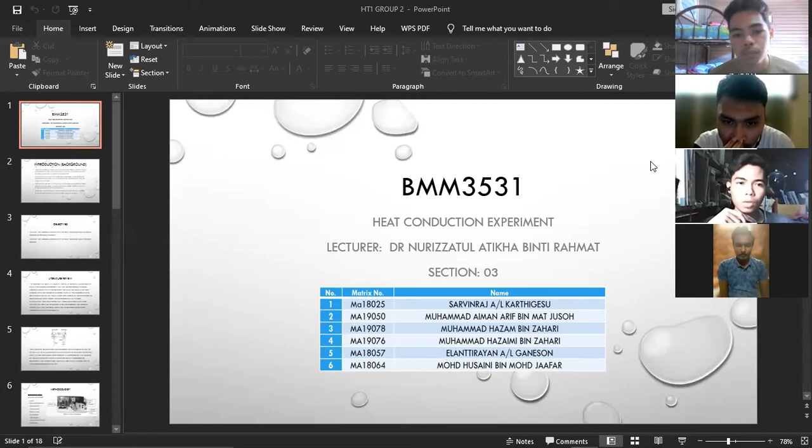So today we are going to present about our last experiment in the BMM3531, which is heat conduction experiment. We are from section 3 and this is our group members. So my name is Muhammad Hazam bin Zahari. I will present to you about introduction and objective for this experiment. Next.

For introduction, the first one is heat is carried by means of collision between rapidly moving molecules closer to the hot end of a body of matter and the slower molecules closer to the cool end. The second one is conduction is poorer in gas because the molecules are relatively far apart and so interact less frequently than in solids and liquids.

The third one is metals are the best conductors of heat because some of their electrons are able to move about relatively freely and can interact frequently by collision. The last one is thermal conductivity is thus a second order tensor, but in a material with cubic isotropy it reduces to a scalar. Next.

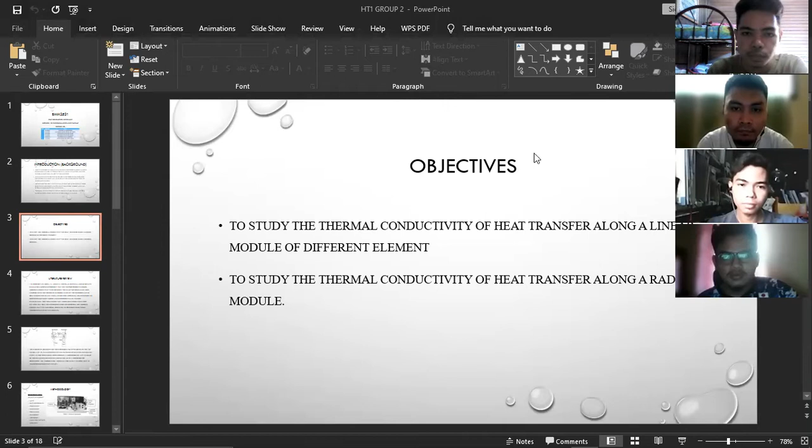All right. For literature review, T.B. Ferrari, S.H. Hara, J.L. Aziant, L. Rocha, E. de Paula, and M. Mulato evaluate a simple experiment that may be performed to assess thermal conductivity for different metallic materials and then compare with the theoretical model given by Fourier's law of heat conduction in 2002.

Using a scientific approach, the fundamental disparities between theory and experimental fact were investigated. They discovered that there are losses and other factors that must be considered when determining the thermal conductivity of a material, resulting in difference between theoretical and actual results.

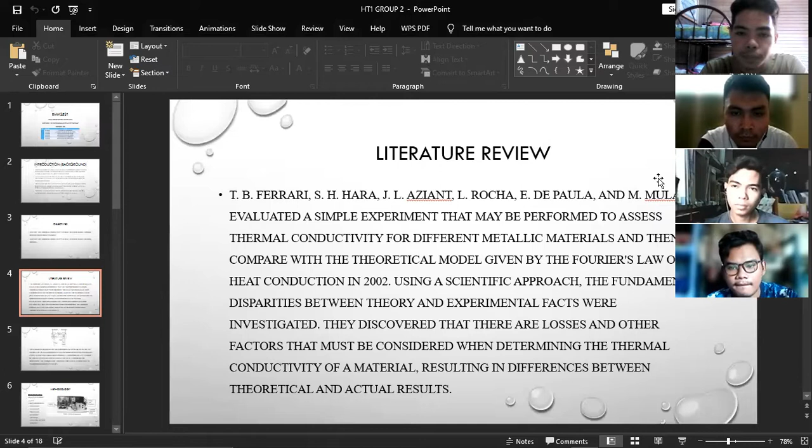The schematic drawing for the experiment setup is shown in the top figure. Cup 1 is an aluminum cup that is filled with water and heated over a flame while being monitored by a thermometer. Cup 2 is made of Teflon and filled with ice and water, with a thermometer monitoring the temperature. Through a metallic cylinder, heat is transported from cup 1 to cup 2.

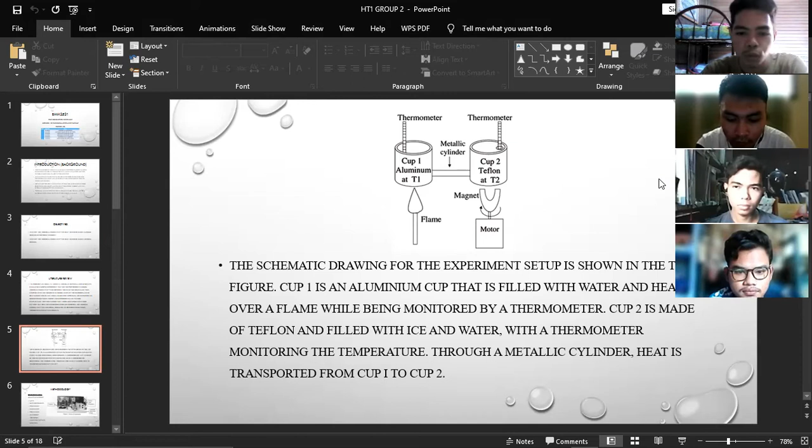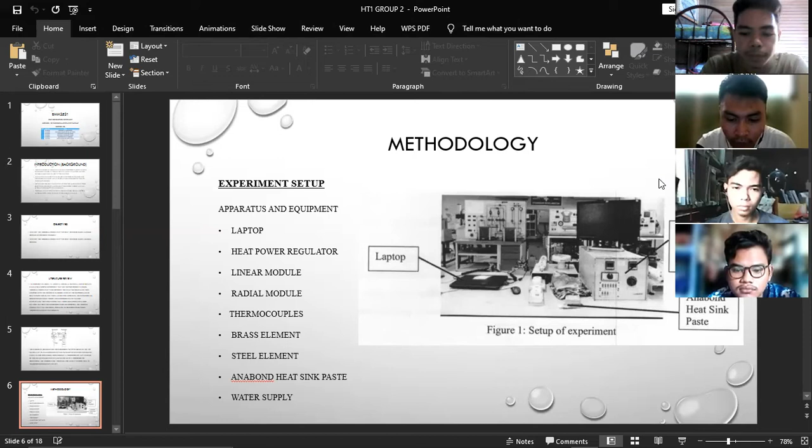For experiment setup, we use laptop, heat power regulator, linear module, radial module, thermocouples, brass element, steel element, heat sink paste, and water supply. Okay, next.

Okay, next we go to the experimental procedure. We have two experiments, that is linear conduction heat transfer and radial module. First, we go to the linear conduction heat transfer. First, the main switch is initially off. Then a brass conductor intermediate section is inserted into the linear module and clamped together. Two, the water supply is turned on and the water is ensured flowing from the free end of the water pipe to the drain. The interval is checked.

Three, the heater power control knob on the control panel is turned to the fully anti-clockwise position and the sensor lead connected. For the power supply, the main switch is switched on, the digital readout will be illuminated. The heat conduction experiment software loaded.

And number six, the heater power control turned to 20 watts and sufficient time allowed for a steady state condition to be achieved before the temperature at all six sensor points and the input power reading on the wattmeter are recorded. This procedure can be repeated for other input power between 0 to 20. After each change, sufficient time must be allowed to achieve a steady state condition.

Now we go to experiment B, that is a radial module. First, the main switch is initially off. The stainless steel section or any other metal is inserted into the linear module and clamped together. Number two, the water supply turned on and the water is ensured flowing from the free end of the water pipe to the drain. This should be checked at intervals.

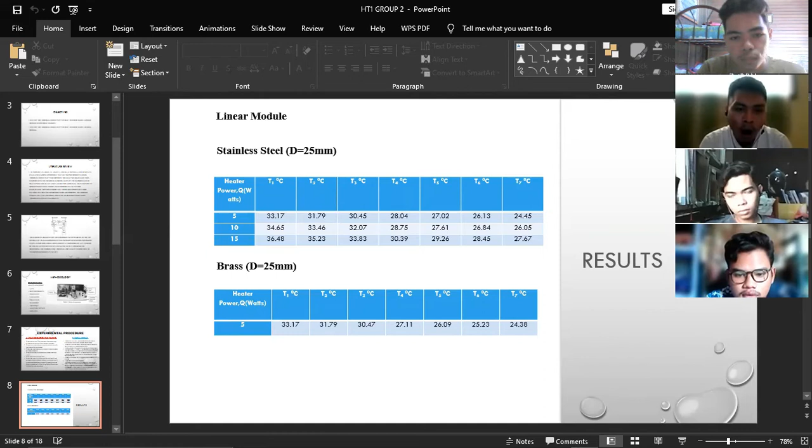Good day, everyone. My name is Sarvinraj Karthigesu. So today I'm going to explain about the result. Okay, this is the result for the linear module for stainless steel and brass. This is the data given by our lecturer, and then we just take the average point for each watt. For 5 watt, we take the average point, and then for 10 and 15 continuously we take the average reading.

Next, from the data above we need to find the gradient. So we use the formula dT over dx. From that we find temperature 1 minus temperature 3, divided by the distance, so we can get the gradient for the 5 watt, 10 watt and 15 watt. This is how we find the gradient for the dT over dx value.

The next part will be the question required for the thermal conductivity. For thermal conductivity, the data given is that the diameter is 0.025 meter, and from the diameter we can calculate the area using pi d squared over 4. Using the formula we can get the area value. From that we can find the k.

This is how we derive the formula for k. From the derivation we can find the thermal conductivity for 5 watt, 15 watt and 10 watt. This is how we get the value for the thermal conductivity. Next, we use the same method for the brass.

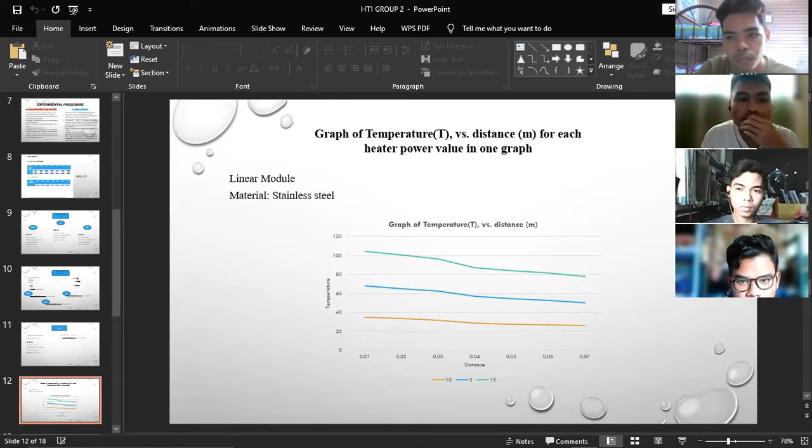It is also possible that the thermocouples are not configured correctly. This would have also disrupted the graph. Readings are taken during the steady state condition because there is no more temperature variation with time. Data collected would be more accurate. Next. This is the graph for the brass.

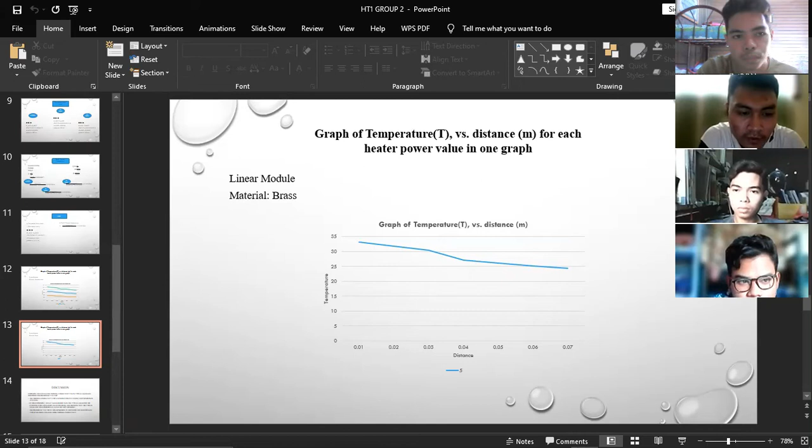The first one is to compare the calculated thermal conductivity to its typical value and describe the discrepancy factor. First of all, the discrepancy factor is the factor that differentiates between our experimental data and the typical data. The thermal conductivity for stainless steel is 20 watt per meter Kelvin, and for brass is 120 watt per meter Kelvin. In our experiment, we got a value higher than the typical value for stainless steel and a lower value for brass, showing that the typical value and the experimental value are very different.

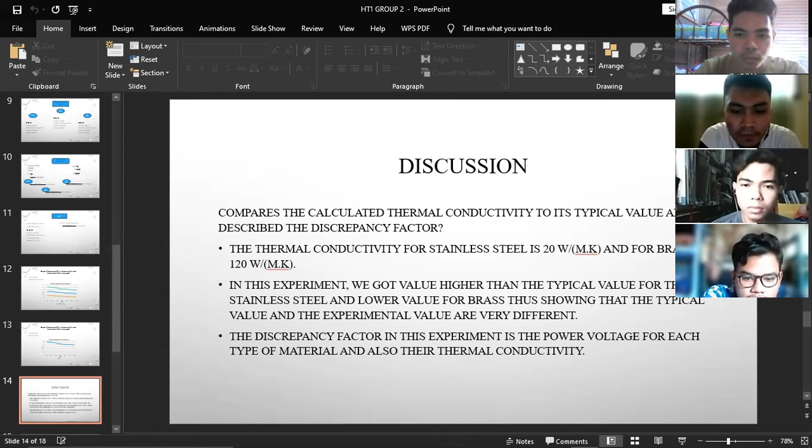So the discrepancy factor in this experiment is the power voltage for each type of material, that is stainless steel and brass. As you can see in our experiment, for stainless steel we use 3 power voltages, and for brass we use 1, and also their thermal conductivity. Next.

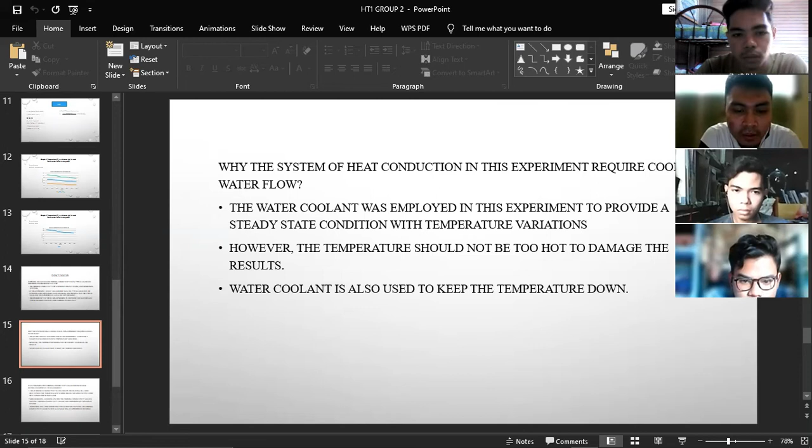So why does the system of heat conduction in this experiment require cooling water flow? The water coolant was employed in this experiment to provide a steady state condition with temperature variations. However, the temperature should not be too hot to damage the result. And the water coolant is also used to keep the temperature down. Next.

So these are the three reasons why the thermal conductivity value for a particular material is important in the engineering field. The first one is a high thermal conductivity rating means the material is a good heat conductor, whereas a low number means the substance is a poor heat conductor or insulator. The second reason is when designing a cooling system, the thermal conductivity value is crucial. Thermal conductivity value varies depending on the kind of system.

And the last reason is, aside from that, while designing insulation for a system, the thermal conductivity value is critical in selecting an appropriate material. Next.

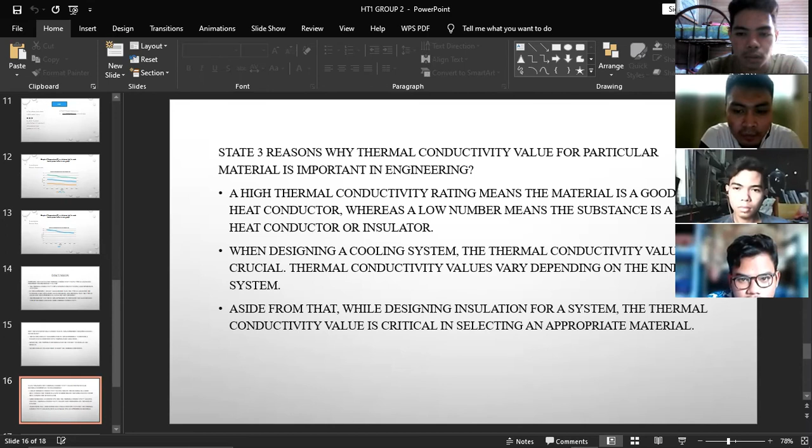So these are three examples of heat insulation methods used in engineering nowadays. The first one is the tank insulation method with cryogenic exposure. Ceramic fiber fabric such as alumino-borosilicate fabric is filled with a silicone elastomer to make a composite material for cryogenic exposure. The second example is loose fill insulation. It is suitable for use between the floor joists of unheated attics or between the side walls of homes that were not insulated after construction.

And the last example is the air gap insulation method. These insulators can boost chip speed by 35% while consuming 15% less power.

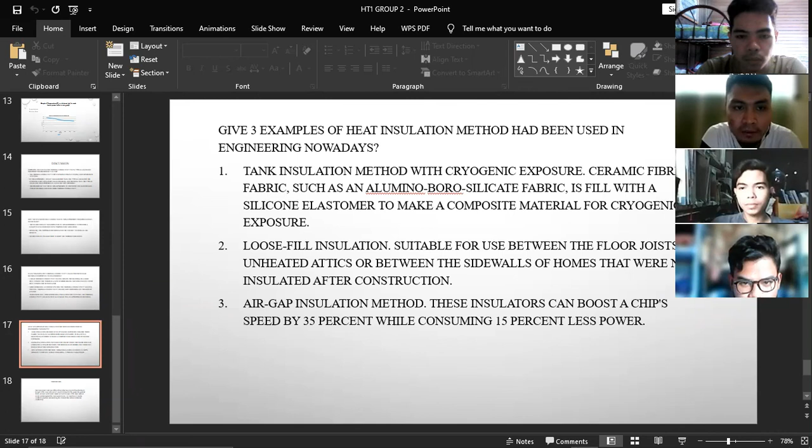Hello everyone, I'm Ellen. As a conclusion, our experiment's outcome differed from what was expected from the theory because of the issue with the sensor's sensitivity. Based on the graph, the gradient dT/dx increases as the heater output increases because of the same material we utilized throughout the experiment. Overall, we learned how to run the conduction machine and analyze the elements that influence thermal conductivity.